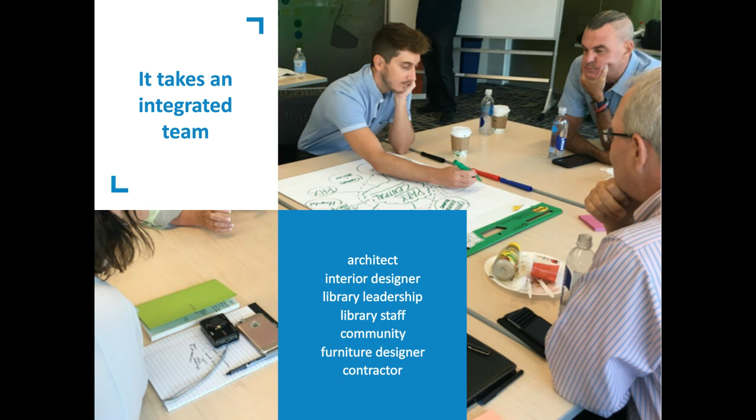So I'm going to go through and try to help you find what your unique story is. We start out when we program by looking at several different areas: community, culture, history, institution, region, landscape. We start off with interviews with community members, library staff, and patrons, but we also do our own research because we think this part of the program is very important at the beginning of the process.

And why is that important? Well, one, it engages your colleagues and your peers in your community from the get-go, and that really creates a feeling of ownership and involvement. The earlier you engage your community and your colleagues and peers in this process, you build relationships.

It also helps you understand the needs and the story of your community. As they see that grow and develop through the design process and see it as a built project, they do take ownership and feel more involvement with that process, which is critical for the life and long-term sense of ownership for your community in that library.

So how can you discover your story? One thing we always try to do, as I said in programming, is really try to understand the culture and community that you live in. Who are your patrons? What cultural backgrounds do they share?

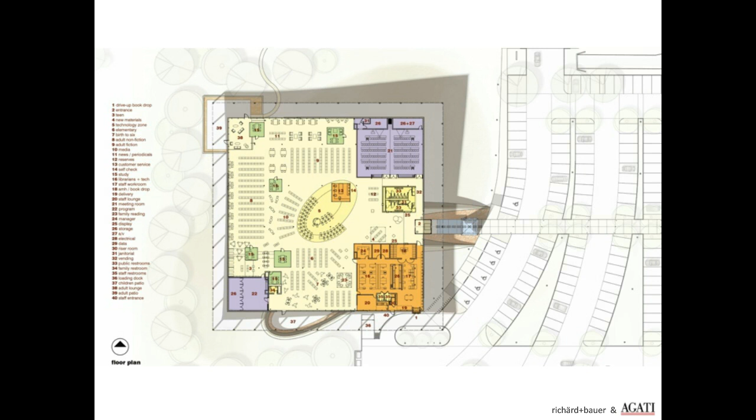It's a 40,000 square foot branch library, fairly standard setup with a multi-purpose room, reading area, internet access and computer commons, work area, and a children's story time room that actually doubles as a tornado shelter. In the plan here, what you see are these green squares sprinkled throughout the space and one large orange one — those are the derrick forms that translate into the interior of the space.

Another interesting part about Oklahoma is that Route 66 runs through it. And what's interesting about that is you can drive Route 66 throughout Oklahoma and really get a sense of what Oklahoma is all about — from agriculture through industry, commerce, the retro signs, the Route 66 bowling alleys, and windmills of the agricultural community that dot the landscape across Oklahoma.

We really wanted to integrate that into the interiors of the building to give you a sense and a feel for what Oklahoma is like in this library. So we were inspired by the history and the signage and wayfinding within the building, using imagery of wheat and agriculture on the end panels of our book stacks throughout the library.

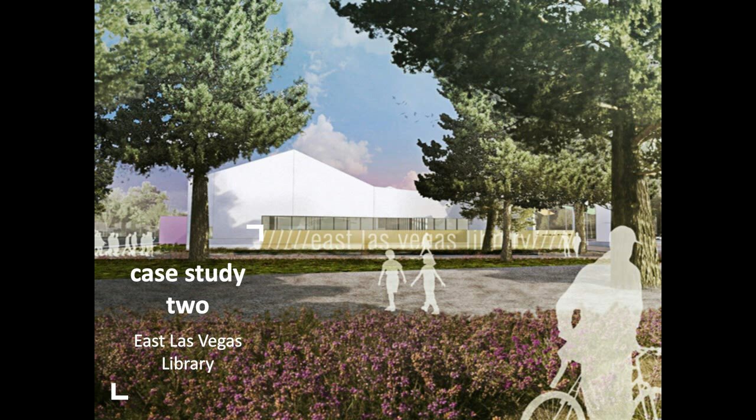What I want you to think about as I move to this next case study is that we really pride ourselves on libraries that are about place. You can imagine trying to pick up that Oklahoma City library and moving it to another site, and it doesn't quite work. So as we move through these, think about where your library is and what's unique about it, and how you can make it a library that you can't pick up and move to another site.

You can imagine that oil derrick library now at our second site, which is Las Vegas — it doesn't make any sense here. This second case study is the East Las Vegas Library, just north of Old Downtown in Las Vegas.

We were inspired in a different sense on this project because of the community and the early programming sessions we had with them, engaging them early. 80% of the patrons in this area are low-income Hispanic. Throughout this process, a recurring theme came up — the idea of large space for community events, both interior and exterior. So we were inspired by the traditional mercado, or markets.

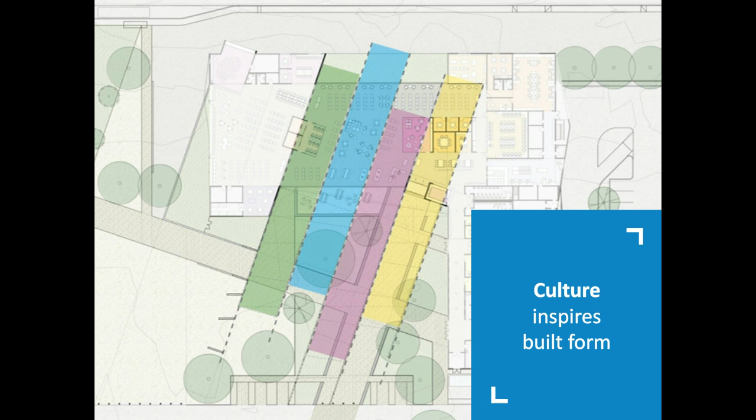We learned from that culture, and that culture inspired the built form. You can see in this plan of the library that it wraps an outdoor plaza space, where all the trees are in the center of the image. We wanted to use that canopy idea to put shade out in that plaza space, but also pull that color and vibrancy into the interior of the library.

As you can see, we use the canopy, color, and vibrancy to create shade in these outdoor spaces, while also creating a vibrant outdoor plaza for community events. Then we pull that into the building to continue that vibrancy through color and references to that cultural inspiration within the library.

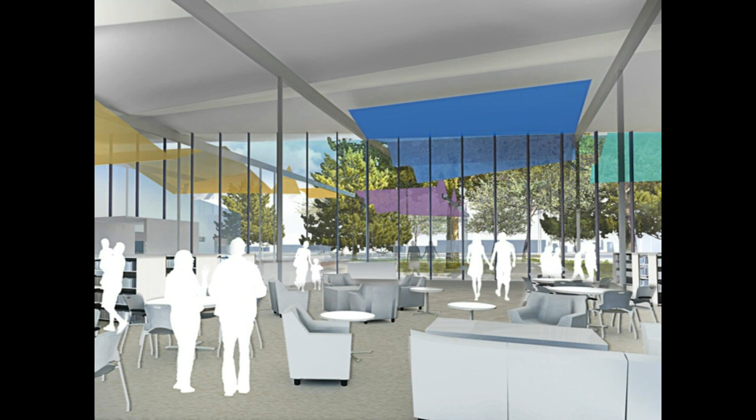Another part of that project used history to tell the story, using the idea of the Talavera tile. Talavera tile is a traditional Mexican tile-making process where they use indigo as a main color. Back when these tiles were part of the culture, indigo was an expensive material, so Talavera tile was often put on important or prominent buildings in the area.

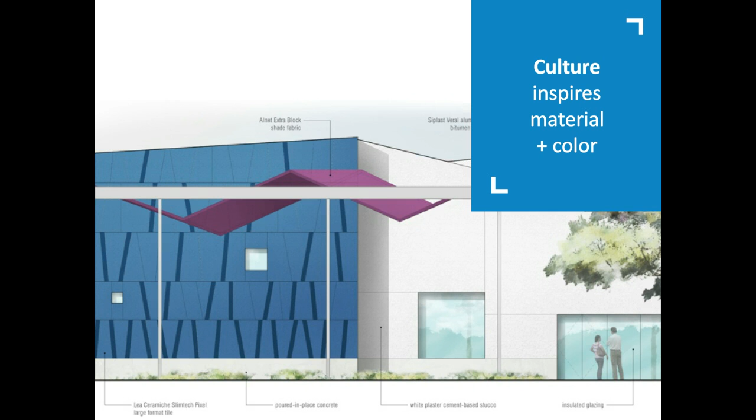And the color blue, because of that reference to indigo, back to the Talavera tile. Now why is this important? We don't do this just to have an interesting story when we work with the client, but so that they can tell the story as well, and patrons can learn it and go out into the community to tell that story to others. It's cyclical: how you tell the story, and how your community starts to understand it and take ownership of your project.

Our third case study is the Prescott Valley Public Library, in Arizona about an hour and a half north of Phoenix. What's interesting about this region, and a good portion of northern Arizona, is that it used to be a volcanic area, so a lot of our mountains are actually inactive volcanoes.

This project was 50,000 square feet, so what we call the lava dome at the center was actually a town council chamber and a performance space, with a large sky deck on top where you could go up and see the surrounding landscapes from the building.

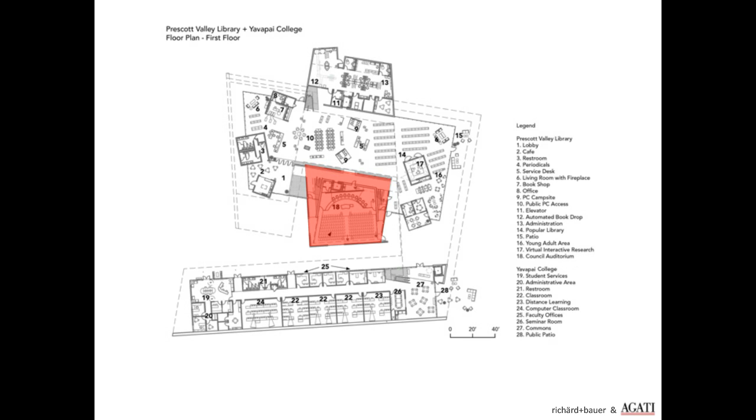Another fun thing about this project: we were able to go out and hike Glassford Hill. There's a lot of outdoor activity and hiking in this area, and we wanted to pull that into the design as well.

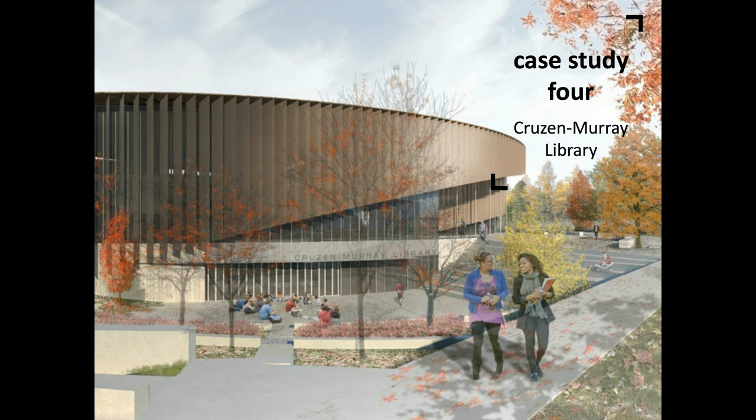They also wanted the library to be a gateway, and I'll show you why in a second. They also had this history of creating an intellectual hub that was popular in different parts of their campus, which I'll start to explain as well.

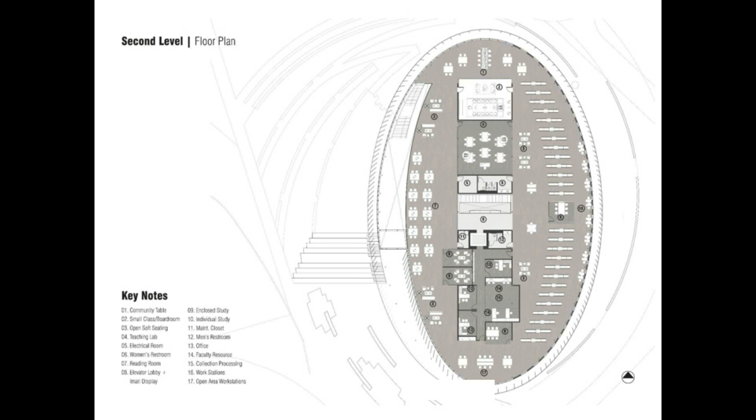We really wanted to focus on this idea of the intellectual hub. That was one of their goals, and they had a really strong example of this on campus.

One area on campus that they actually named the Boone Table has to do with a simple piece of furniture in one of their buildings where all the TAs would hang out after class and before class. It became an intellectual hub for conversation, discussion, and learning, not from professors but from your classmates, a spot for social interaction. This simple table became a symbol on campus for that intellectual hub and communication, a large part of their culture and tradition.

So part of their goal, when we had the programming discussion, was how do you recreate that, or translate that, into a new library space? We took that to heart, and that idea of institution-informed, customized furniture, Joe's going to talk more about this, was really about trying to replicate the Boone Table as the cultural hub within the library, but in a more modern way, using furniture in a large, grand reading room to create that intellectual hub within the library.

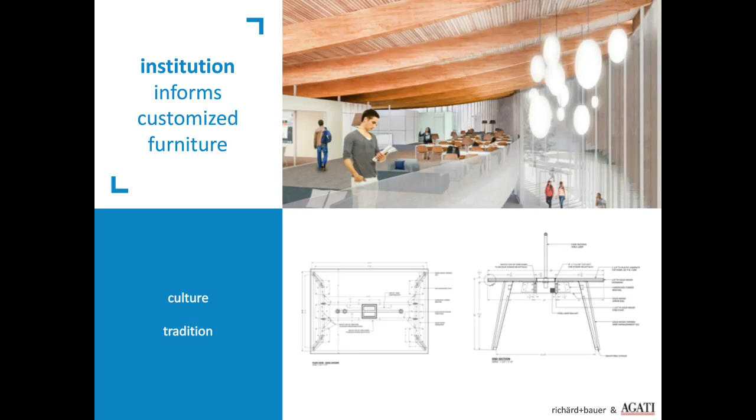So what we'd like to talk about now is, we've given you some ideas of how you can start to discover your story, why that's important, and then given you some examples of how we've used our clients' stories to inform the design of projects in multiple different ways. But we want to get a little bit more in detail and talk about how you can translate your story into actionable items on a more micro scale. So this is where we're going to transition, and I'm going to hand it off to Joe.

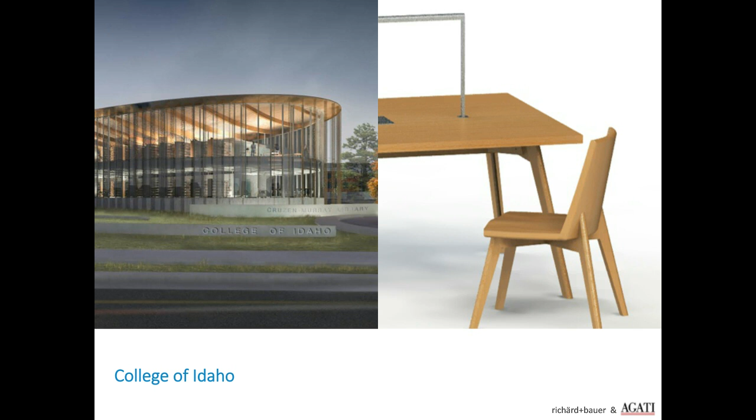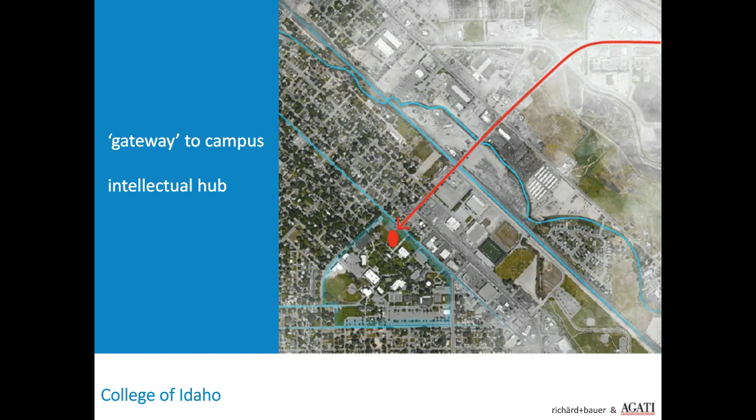In this instance, we want to start off with, okay, what are the predominant work patterns and what is the culture of the user? Like Lee said earlier, the library was this thought, this gateway, this intellectual hub. And that's coming right from faculty and students. So that gives us a clue into the culture they want to have or want to create.

So it's probably going to be extroverted, probably collaborative. I'm guessing, but probably going to have a heavy element of sprawling, that if they're going to want to work together in groups or whatever, they're probably going to need a fair amount of space to do that in. And they alluded to that with the Boone Table, as they called it earlier.

So what are the work patterns going to be? Probably mostly group, either collaborative or social. It's hard to say. Probably there's going to be a lounge element in there. What Lee didn't talk about was, they alluded to liking the Boone Table and other things, but there was a lack of comfort. So there may be a lounging component to the work patterns as well.

So taking that into consideration, going through the research and observation phase, we learned about their background, about their culture. So they want large work areas, they want group meeting space, they want this comfort element.

And then taking that through the investigation part, okay, so we have all of that. Is that enough? We just had the Boone Table. That satisfied a lot of it, but is that enough? Well, no. So in today's age, we need access to power.

We need access to data. Lighting - there's a lighting component that we want to bring into the furniture. Comfort - the Boone Table is great, it's not very comfortable. And then there's an aesthetic standard that they want to set for the new space. So how do we create this Idaho aesthetic in the product?

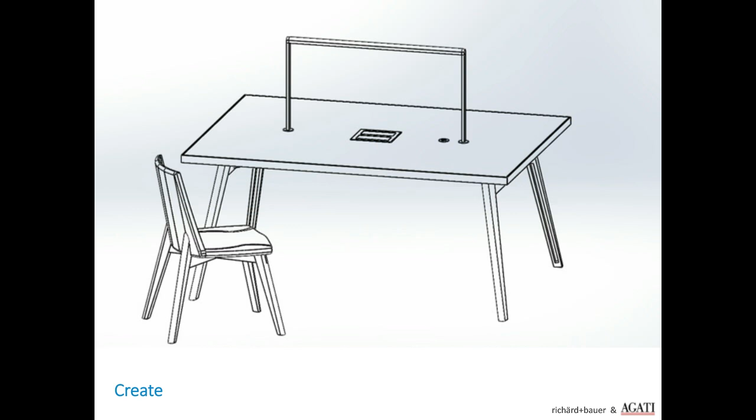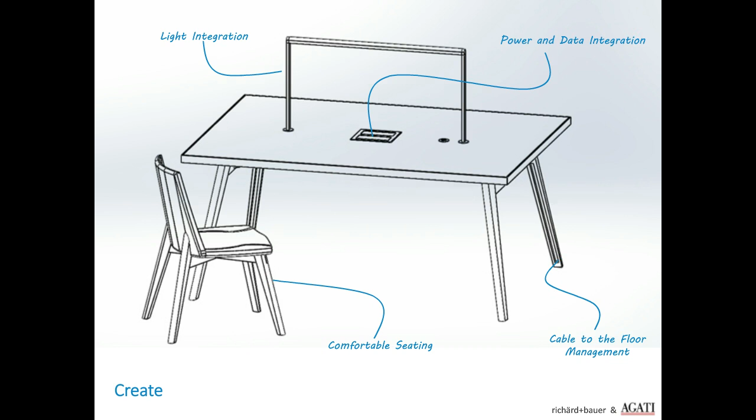That's where it lines up nicely with one of our standard products, but not all of it. So adding power to it, or adding lighting, integrating power, managing power down to the floor - that's always kind of tricky to do. It's actually one of the more complicated things we do in furniture. And then instead of using a bench seat or something like that, using more individualized chairs to create that comfort element for people.

And then bringing in the quote-unquote Idaho aesthetic - being able to offer the table with a solid wood base, and then translating wood throughout the product, except for in the work surface, where we use a wood laminate to still hold that look, but you want the laminate for that long-term durability. The veneers are nice, they're very warm to the touch and to the senses, but they're just not going to hold up in the public space as well as a plastic laminate would.

So that's how the process kind of went through on that project. I want to give you another example. This was Scottsdale's Community College.

Going through the same kind of steps here, understanding the culture. Community colleges are tricky because they're a makeup of a lot of different people. I went to University of Illinois, down in central southern Illinois, and it's pretty much the same people that are all there, from Chicago, suburb of Chicago, or rural Illinois. It's very homogenous. A community college is very different. You have a large makeup of different people, so you're dealing with a lot of different cultures and work patterns.

So you can have extroverts, introverts, sprawlers, multi-generational. You find that a lot at community colleges, people that maybe have been out of the workforce or coming back in, and at Scottsdale, having a collaborative element as well. The more cultures you have, the more quote-unquote predominant work patterns you're going to have, and they probably check almost all the boxes, which makes it challenging to balance out the space, but not impossible.

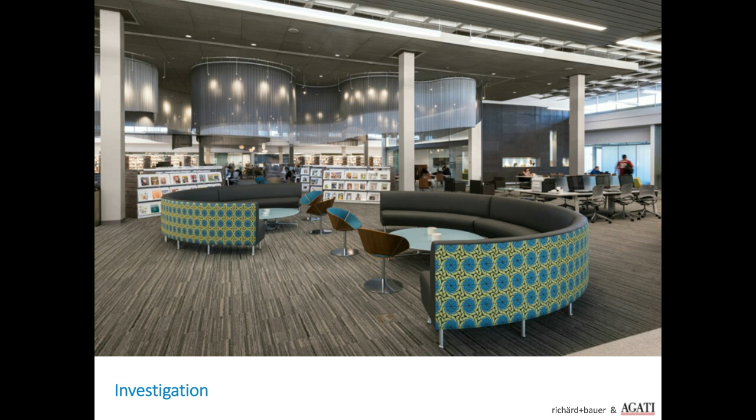So through the investigation, this is the library space. You can see it's very open. There's a very diverse makeup of furniture. In this picture alone, you've got some touchdown space, some lounge space, large sprawling space, computer space, things like that. Here you've got some sprawling space, lounge space. It's a little hard to see, but we're going to focus in on this particular product right there.

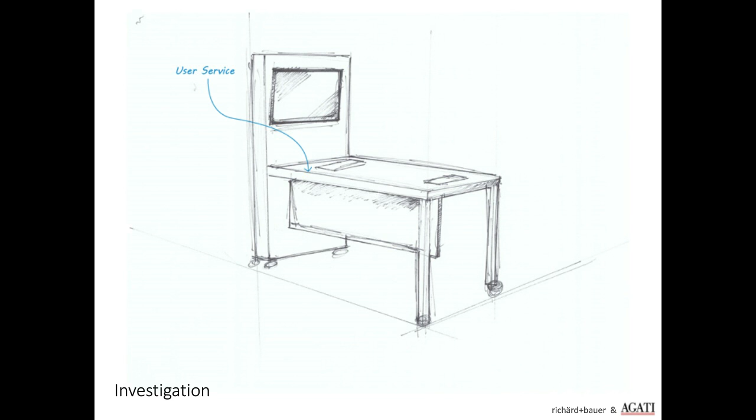So we didn't really talk about what this means - they want to change the service model. They want to create a unique way to interact with users. This became the whole segment in this project, where they wanted an element that a user could come up to, where a librarian could sit with them, interact with them, answer questions, show them how to do research, whatever it may be, and provide services to that user.

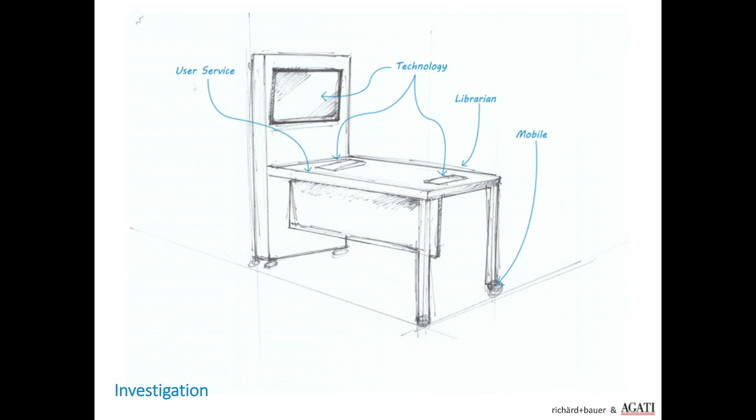They needed a technology component, so they wanted to provide this service information through a technology angle. They wanted to be mobile. They wanted a certain level of mobility and flexibility to their space. They didn't want a big service desk stuck somewhere like a giant spaceship - this big barrier to interacting with the staff. And they knew technology was going to evolve and change over time, so how do they access that? That became a big component.

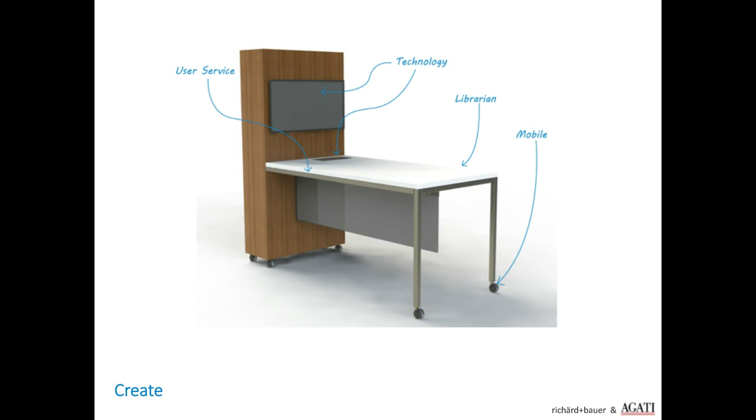So that translated into this element here. You have your user and librarian side. You have your technology integrated into the piece. You have your mobile components, so we're able to put that on casters to satisfy not having to have this big desk in the middle of a room that was permanent - this unit could be mobile and moved around throughout the space. And then creating elements to be able to access the electrical.

Technology is tricky because it does evolve, and you really don't want to have technology integrated in such a way that you can't upgrade it. The furniture should really be kind of a platform for any tech component that you can change in and out fairly easily.

So that's two ways we go through this kind of micro process, walking people through to understand from the culture side to the user side to the work pattern side, and then delivering that through into the product to achieve the right kind of balance in the space.